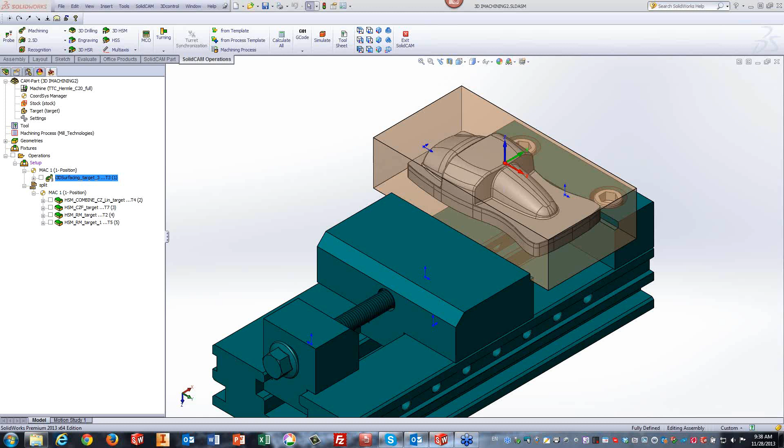Now, if we take a look at the part on the screen itself, you'll note that's a typical 3D part. You can see it being held in the vise. If I take away the vise itself and the stock, you'll see this is the actual part. This is a part most of you have already seen in 3D iMachining demonstrations, but I decided to go into it anyway to show some different options that we have today in iMachining 3D.

Now, if I were to open up just the operation for a moment, we'll take a quick look. Of course we have our target, and I just want to mention again the working area. If I go into define, you'll note I didn't choose any working area, but the only thing we have here at this moment is that it's automatically set to cut only the rest material.

In this particular case, I'll be using a 12 millimeter end mill with a 0.6 millimeter radius on the tip. And if we go into our technology wizard, you'll note that we'll be going down two steps on the part. It's broken up into two separate steps.

Also note, however, that if I were to do this in two separate steps, you would have all the material left over in the middle that still has to be roughed out. And of course, in our technology area, that's where we have the area for the rest rough, whereas the rest rough will automatically step up on the part.

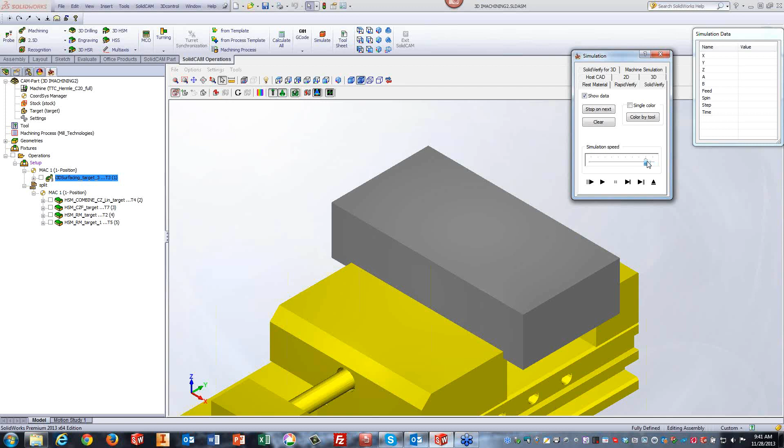Now, you'll note that it's going down its first step, and when it finishes its first step, you'll note that it's cleaning up as it's going up on the part itself. Notice it didn't go down to its next step. It went down its first step only, and then it went up to its next step. Now, let me show you exactly why.

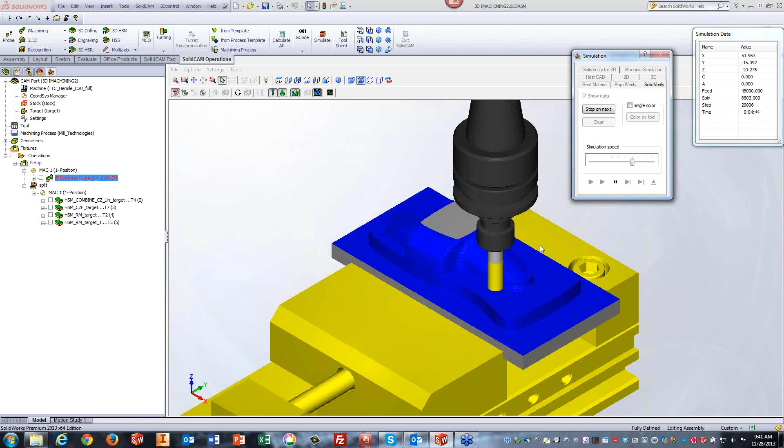If I go into the operation itself, you'll note again, if I go into technology, that we have the option over here of each down step, then rest rough. So it first does the down step, then rest rough up to the very top. Then when it finishes that, it goes down to the next down step, and then again roughs up until where this one left off.

Now, you'll notice also in my screen right now, this is grayed out. In other words, you only have the option of the very first one. The reason why it's grayed out is if I go back into tool, we have another option over here which I've used called holder collision.

When I use holder collision, it automatically closes that area over there and uses the step down first, then rest rough, and then another step down, and then rest rough again.

If I were to uncheck holder collision and then go into my technology, you'll note that both fields are now open. This, by the way, is very important to make sure that when you're using your tool with the holder, you can get as close as possible as you want without fear that the holder will hit the stock material.

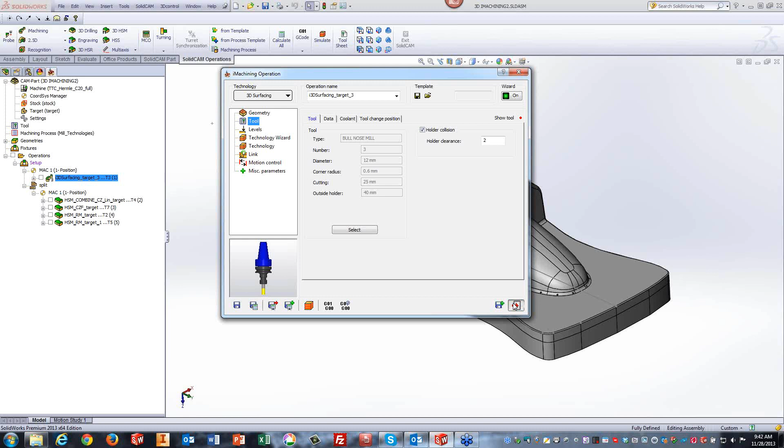Now that we've cleared the material using the iMachining 3D, I decided to continue on with the part using HSM to finish off the part itself. I've used several different types of strategies to do this. My first strategy was as follows.

I want to first work on this area over here. Note we have a flat area over here on these two sides, and the rest, as you can see, is working. We have areas that are relatively steep, and areas that are relatively shallow. This area over here is not a flat surface, it's actually an angled surface with a little bit of radius, so it's also relatively shallow.

Now, we know in the past that constant Z works very well on steep areas, whereas linear works much better on shallow areas. We have the operation of constant Z and linear, but we also have, if I open up the operation, an option of combining constant Z together with linear, which is exactly what I did in this case. Let's first take a look at the simulation.

I'll use the wireframe for this simulation. Run my simulation, I'll slow it down a bit, and note it first does the constant Z, and when it finishes the constant Z, you notice it's working on these walls over here. This area did not touch yet.

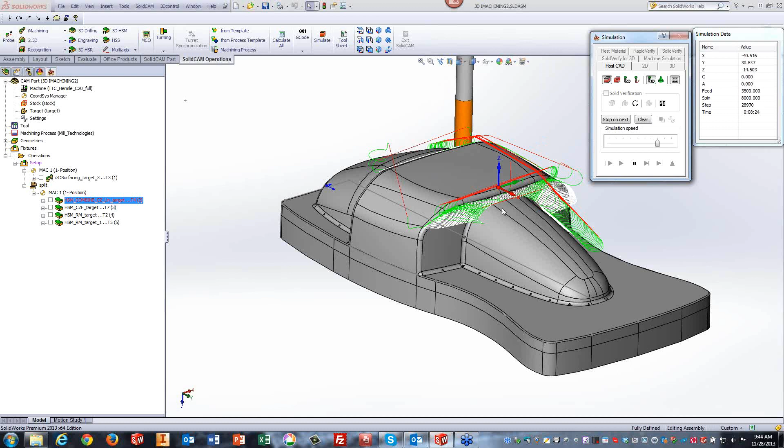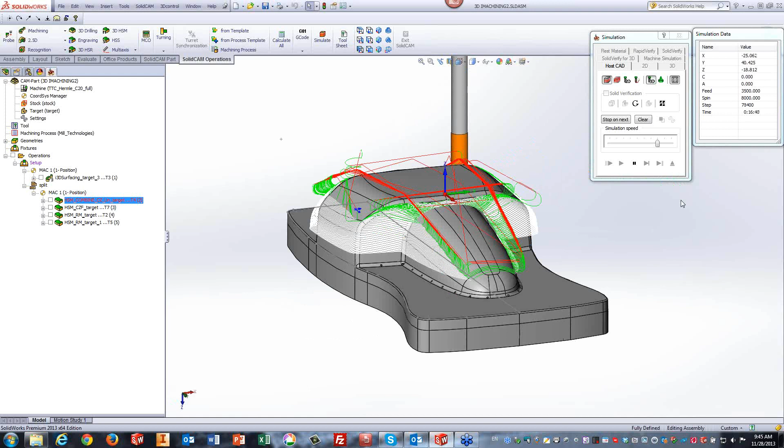This area over here wasn't touched either. Now this area is steeper, it's starting to work on this area as well. Same thing over here, this area is steep, it's working on these areas here too. Go around the part, it's being done on the entire part. When it finishes those areas, it'll start doing the linear cuts as shown over here.

We're about to start it. Let me just finish off over here. Now you can see these areas were done with linear cuts across the part, which are shallower areas. Now you'll note that when I did the linear cuts, it did not touch this area.

Now the reason why I did not touch this area is not because of my boundary. The boundary that I gave for the part itself, if I were to actually go back into the operation, the actual constraint boundaries, is the entire part. But what I did was as follows.

First of all, let's go into my constant Z passes. You'll note that to keep it on the steep areas, I limited the angles of engagement between 40 and 90 degrees on the part. If there's anything less than 40 degrees, it won't machine over there, which is obviously these areas over here, as well as the floors, because it's less than 40 degrees.

Now, if I go into my linear passes, we have it up until 43 degrees, but I also limited the minimum angle to 0.1. Since this is a flat floor, if I just give it a touch of an angle over here, it won't machine this area at all. So instead of making a boundary around that area, I just simply changed the angle to 0.1. Made it a lot easier that way, and this way it did not work on the floor at all.

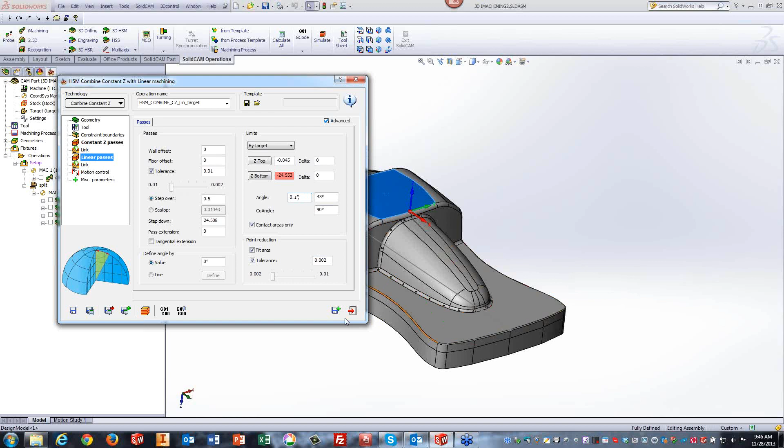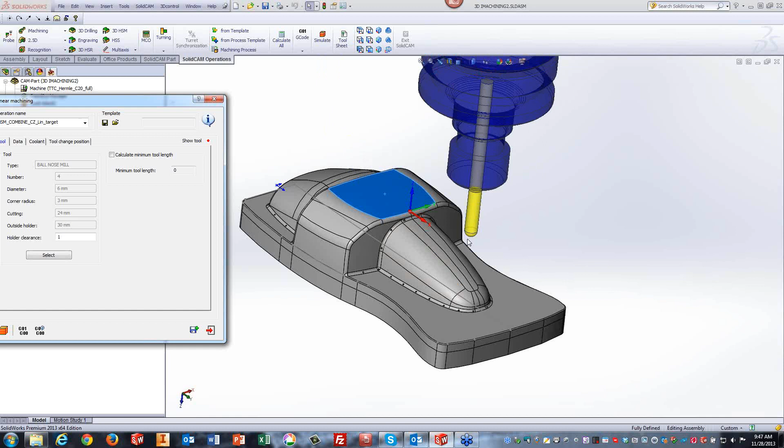Now, what I did in my next operation, oh, one more thing I forgot to mention, in my geometry page, since I'm using a 6 millimeter ball end mill, the radius of that tool is larger than the radius that we have over here in these corners. So to prevent having a sharp turn or sharp corners in the toolpath, in the geometry area, I've added the option of apply fillet. By adding the apply fillet, what that actually does is very simple.

It adds a virtual fillet to those corners according to the value that I put in here, and that value is larger than the value of the tool. This way I guarantee myself a radius toolpath in that corner.

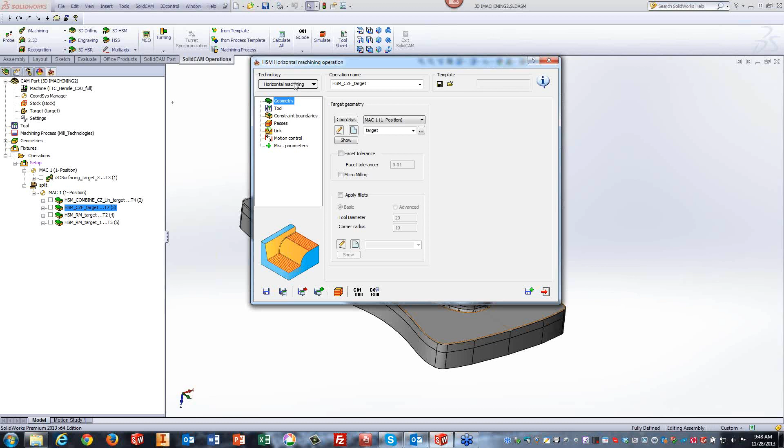Let's go into our next operation, where I dealt with my flat floors by using horizontal machining. This is specifically made to recognize all the flat floors, meaning they're exactly 0 degrees. I've used a tool with a flat bottom, actually a bullnose tool, not a ball end mill, because on flat areas like this I can work with a flat bottom tool to cover more surface for fewer toolpaths.

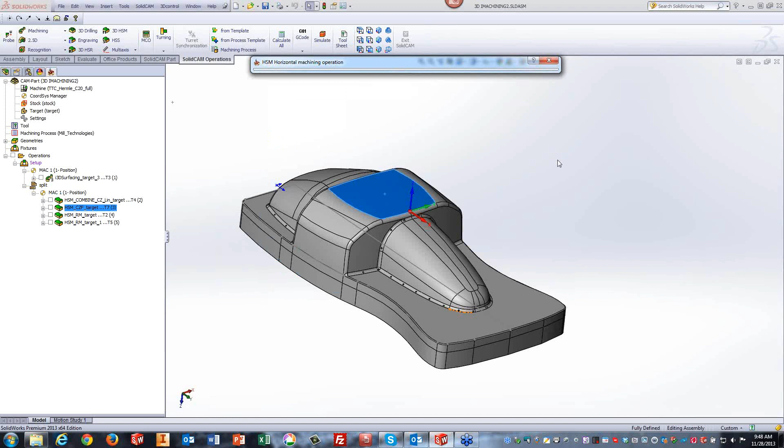In our passes area, I've checked the box called Detect Core Areas. The reason is that these floors can actually be approached from the outside, rather than having the tool come down on top and work its way out. This is now an option in horizontal machining under passes, called Detect Core Areas.

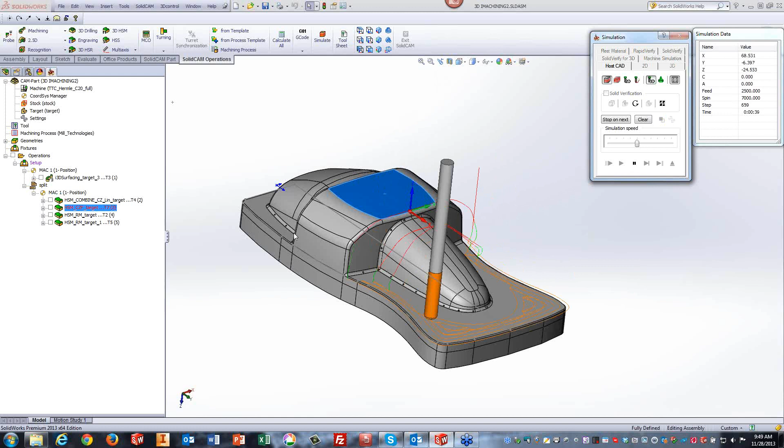Let's take a quick look at the simulation. I'll run it and slow it down to show the tool. You'll see the tool comes from the outside, working its way in, and the same thing happens on the other side. It works from the outside, not coming in from the top.

Let me change the color of my toolpath to make it easier to see. I'll run the toolpath again, and you can see it working from the outside going in, same thing on this side as well. Now, of course, we have to deal with the corners.

The corner is actually pretty small, and if I were to go into these corners with a very small tool, say a 2mm radius at the bottom, in other words a 4mm ball end mill, I'll still have a lot of material left over. I'm asking that small tool to take off a lot of material, and this can sometimes be difficult for that type of tool.

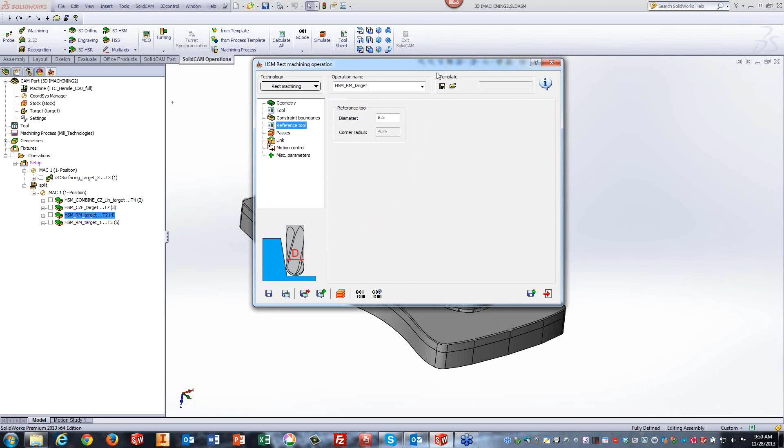So I've broken it down into 2 steps. In my first operation of rest machining, made specifically for removing excess material on those corners, I used a ball nose mill of 6mm, so a 3mm radius on the corner. In my reference tool, since the fillet I created was 4mm, as if it was an 8mm tool, I gave it a reference tool of 8.5 to give it a little overlap.

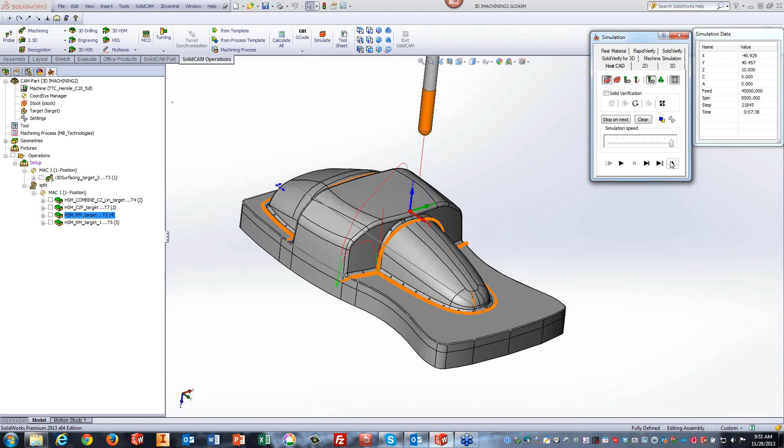This works exactly as I wanted across the part. Since I'm working with a 6mm ball end mill, I'm leaving a radius of 3mm now. I still have to take this down, but since it's a larger tool, it worked a lot easier on that excess material. Let's go into my next operation.

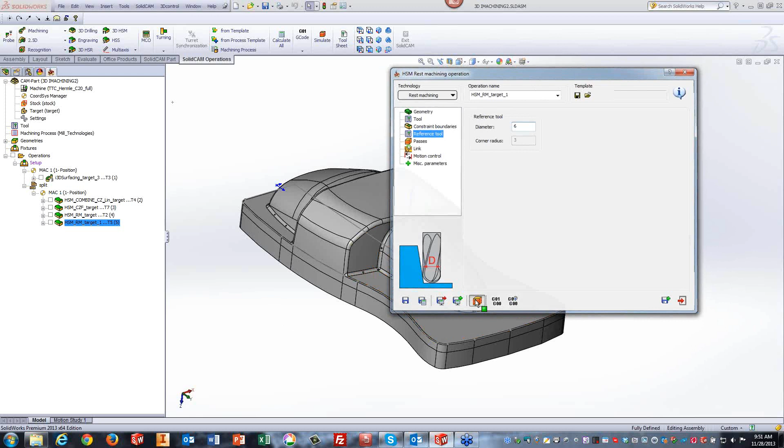In this operation, again rest machining, I used a smaller end mill, taking it down a step. In my reference tool, I used the actual reference tool from my previous operation, the 6mm ball end mill, so it just continues from that point. Looking at the simulation, you'll see it works exactly in those areas as well.

Okay, let me start now my next part. Actually, let me first close this - I like closing the part first and then opening it, although I can do it the other way too.

We'll open my next part. The next part that you're about to see is actually a sort of a mold.

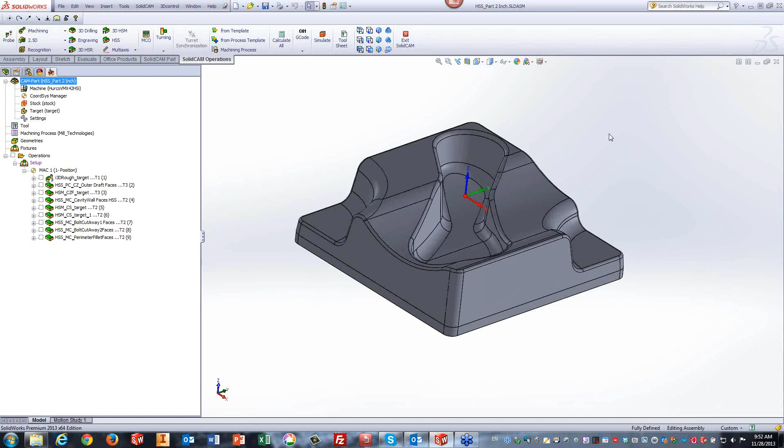First of all, these floors over here are flat as well. There's a little bit of a flat area on top, and I believe this area is also a flat surface. Now, we have a nice area that's also kind of shaped, relatively shallow.

This area inside is also a shallow area. You'll note these walls on the side are actually tapered walls, and we have a nice radius, a nice fillet going around the entire outside of this part.

Now, the roughing that I've done on this part, I used 3D iMachining 3D. Going into the part itself, you'll note we have our geometry. I did not create any kind of a working area, we just have the cut-only rest material.

In this particular case, this part was done 1 inch, so we have a 3/8 of an inch, which is approximately 9.5 millimeter end mill on the part itself. It has a little bit of a radius on it as well on the corner, as shown over here we have a little bit of a corner radius.

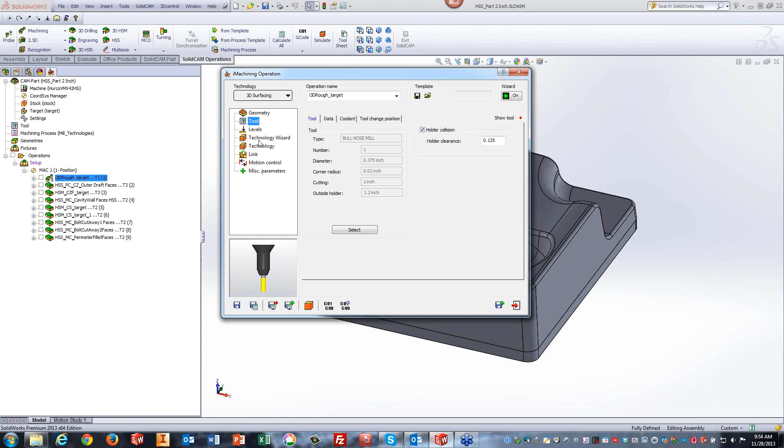Also note, I'm using the holder collision. If I go into my technology wizard, we have going down 2 steps onto the part, and of course we have the rest rough working here as well to take off the material as it's going up. Take a quick look at the simulation.

I'll use the Solid Verify to simulate the part. You'll see that the tool, I'll slow this down, first does its cut over there, going into that pocketed area, machining it out nicely, as well as this area working its way in.

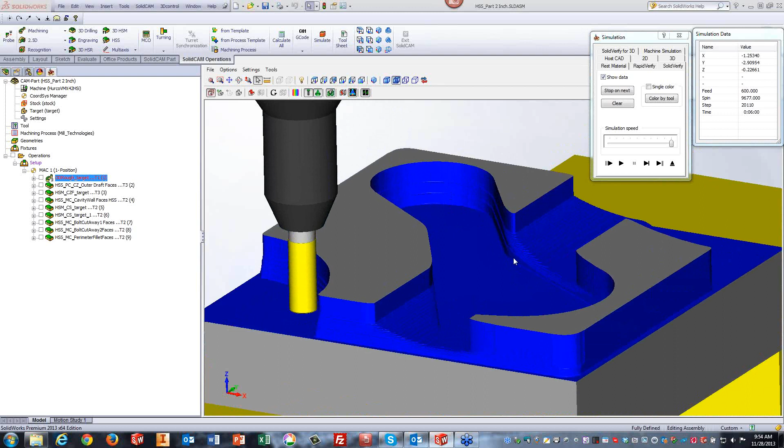Let me stop here for a moment. You'll note that it's starting to go up on the part itself. You'll also note that this area has less steps than this area. This is what the scallop control actually does. Since it's a scallop control, this is a shallower area than this one. This is a very steep area, so it doesn't need all these small steps on the surface. It's enough these large steps over here to get the exact results that I need.

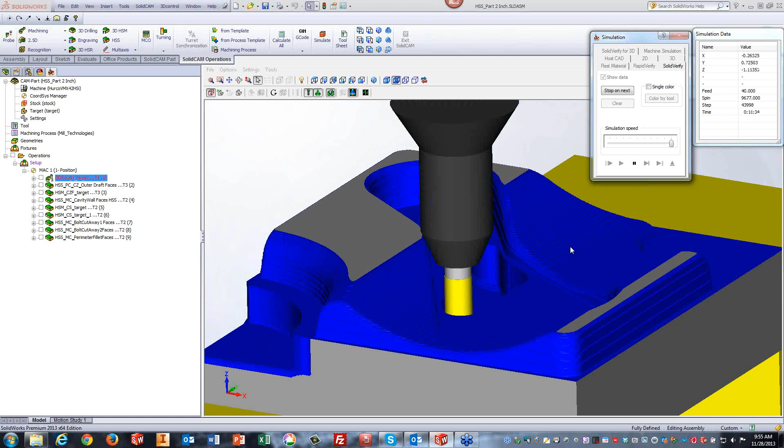Continuing on with the simulation, you can see that as well over here, the differences in the steps as it starts going up. And we have it going down on the entire part. Again, it went down now to its next step, and then it starts working up on its next step all the way up to the top as well.

Now we actually started with the machining on the part. Actually on this part, not only did I use HSM in certain areas, I even used HSS as well. Even though the webinar is not on HSS, I'm just going to show you some of the steps that I did in HSS, because I think it's really very nice the way it's done in HSS in this particular case.

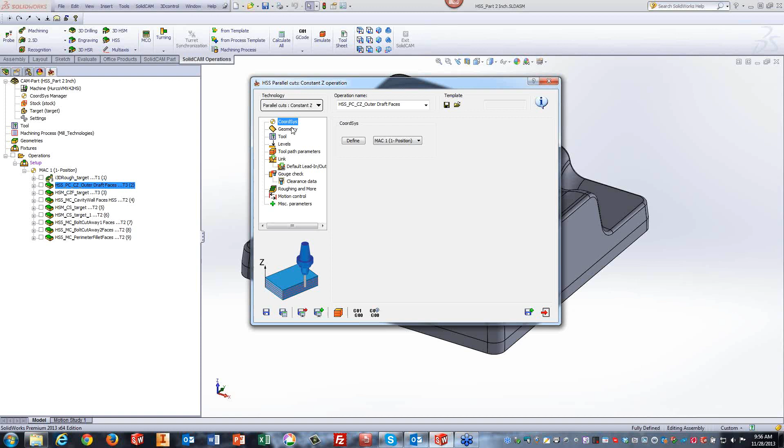What I did in my first case was I dealt with the walls around the part, and I actually used the constant Z option in parallel constant Z in HSS to work on these walls. Let me just go into the operation itself, you can see I use the parallel cuts constant Z. In my geometry, you can see that my drive surface is the surface going around the walls itself.

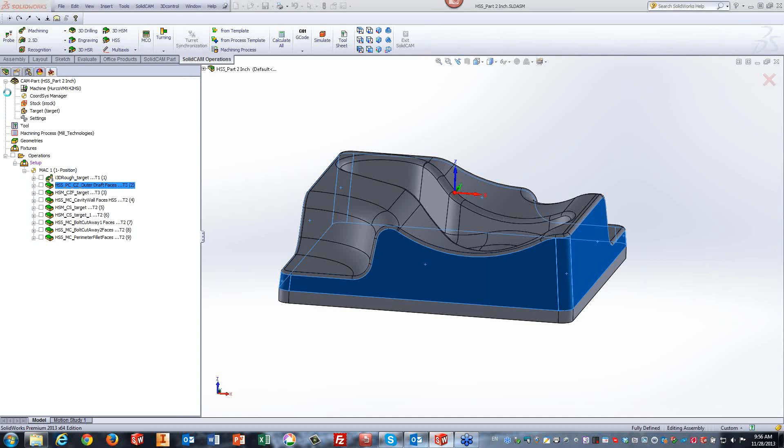Note that in these areas over here, there are actual gaps going to its next area. So the way I dealt with that, instead of going across to the next area, if I were to go into my toolpath parameters, I went into sorting, and in sorting itself I changed my machine by to be regions instead of lanes, which is the default, so it actually works in different regions at a time.

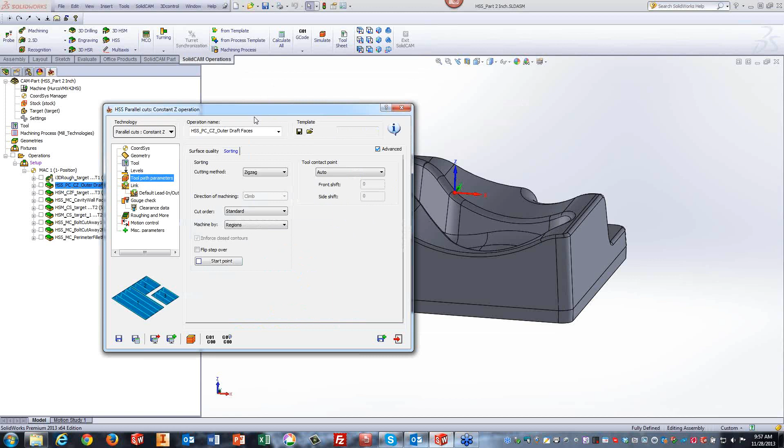So instead of continuing on to the next area when it sees an area over there as a different region, it'll work back and forth in this area, and the same thing as it goes down. So you won't have that jump as it goes to the next surface. Instead, it'll work on this surface over here. When it gets down to the very bottom, this area will continue working as one continuous surface.

Let's take a look at the simulation itself. It's a very simple but clean toolpath around the part. Let's take a look, I'll make it go a little quicker. You can see that in these areas there are very little jumps going around on the part itself.

When it went to this area over here, it didn't go across to this area, but instead it actually continued working. And on the bottom over here, this area itself just continued working around on the bottom. This was done simply with HSS. I thought it was actually a very nice toolpath, so I threw that in here as well.

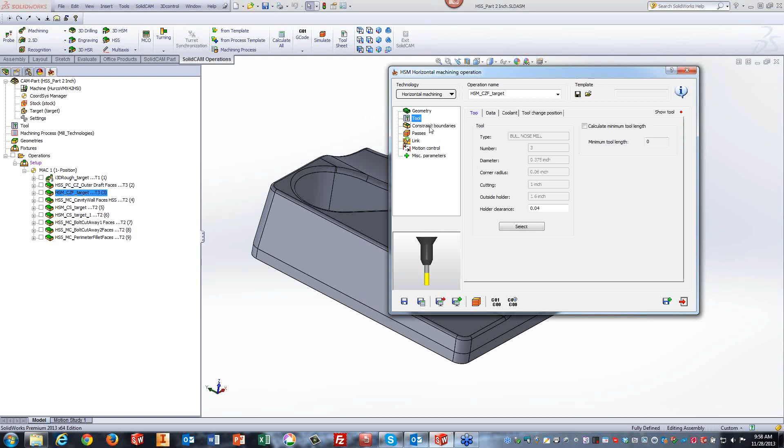Now let's continue, however, with the HSM. In the HSM, first I dealt with the flat floors in this particular case, and if I take a look at the operation itself, we have horizontal machining. We have a tool that has a flat bottom to it with a little bit of a radius.

In our constraint boundaries, I decided to give it a boundary, even though I didn't really have to, of working between the outside. Take a look at the bottom over here at the top view. We have between the outside and this area. The reason why is because this area over here is also flat, but I did not want it to work in that area itself.

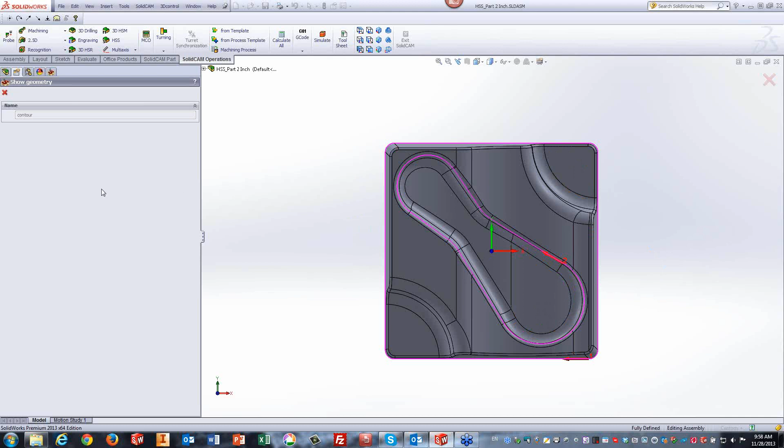So I just limited it to those areas over there by doing a simple boundary name. Note again my passes - I have detect core areas so that I can go in from the outside on those areas as well.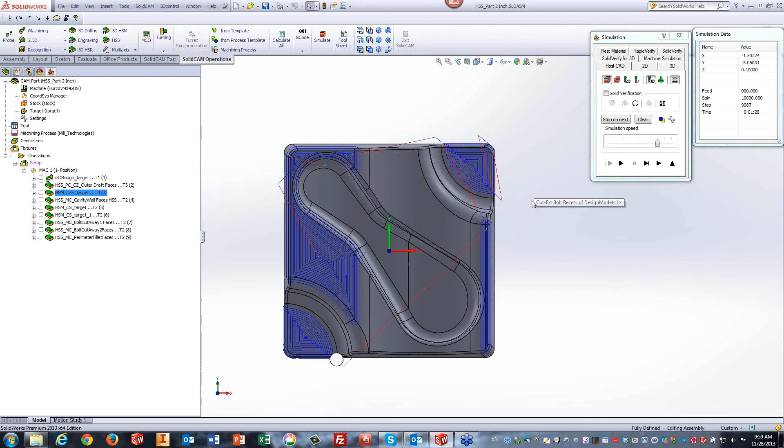Now let me start talking about our next operation that I want to show you in HSM. The next operation in HSM that I'd like to show you is actually something called 3D constant step over. If I were to open up the operation itself...

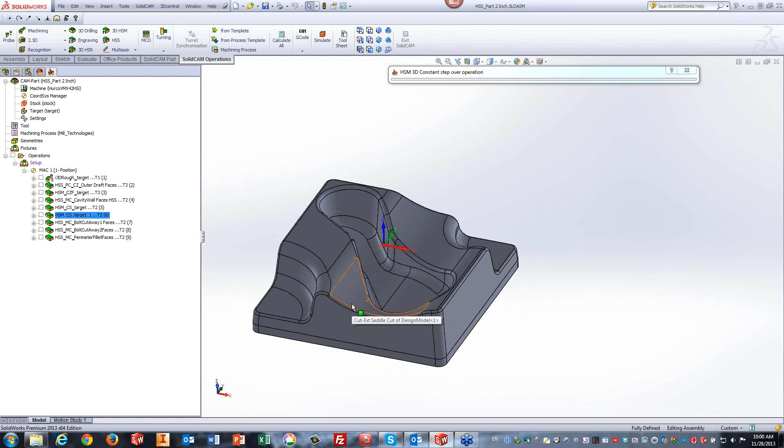First, before I actually talk about the operation, I want to look at these surfaces over here. Note these surfaces, as well as the area inside over there - these can be done very nicely in linear. However, what I've decided over here is, I'd like to actually have the tool, instead of going linear back and forth on the part, work according to the shape of that particular area.

Many people I know that work in molds actually like to have the shape of the toolpath itself going according to the shape of the area. So for this, I've used the option of 3D constant step over.

Now, the constant step over means as follows. It actually combines - if I go into passes, you'll note the horizontal step over and the vertical step over. What this does is combine the two to give an even step over no matter what the surface condition actually is.

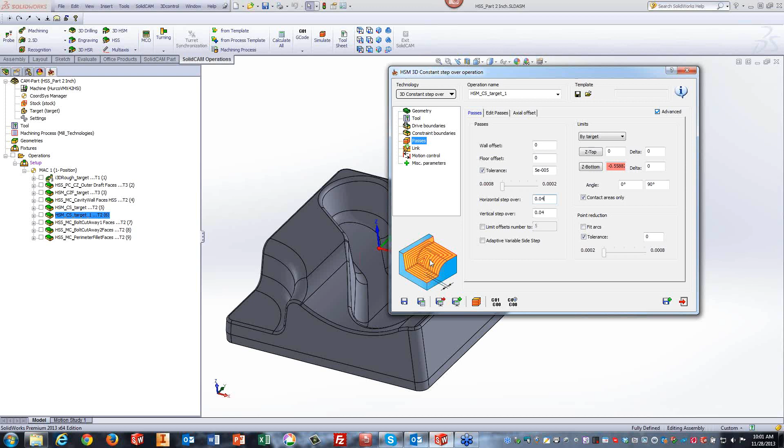So if I have them both set at the same number, even as it goes down from the top view, you'll note that the distance in these areas between step and step will be the exact same as it goes around the part itself. Let's take a quick look at the simulation.

With the toolpath, let me speed it up just a little bit. You'll actually see it's taking the shape of that particular area as shown over here, which gives us a really nice, clean toolpath on that surface.

Now, I did large step overs just so that you can actually see the toolpath itself. Obviously, when you're working on a real mold, the toolpaths and step overs will be smaller, so you can get a nice, smooth surface as well.

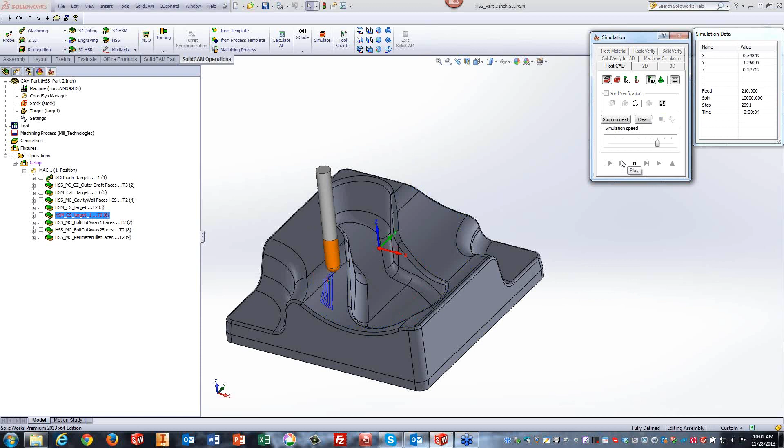Taking a look at the very top of the part from the top view, you can actually see the real toolpath that we're getting along the part itself. The same was also done in this next operation, doing this floor surface over there as well.

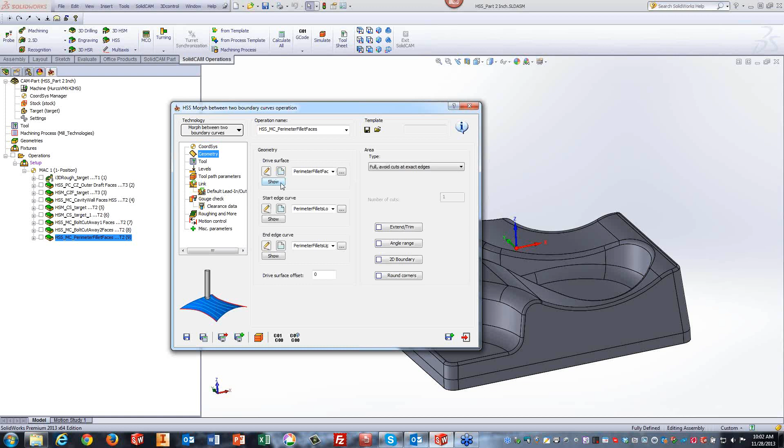We're just about finished with the part, but one thing I had to show you was how nicely the fillet was done on the part. If I go to my next operation, this was actually done using HSS. In the HSS operation, you'll note I use the option of morph between two boundary curves, whereas my first drive surface was the radius around the part itself, as shown over here.

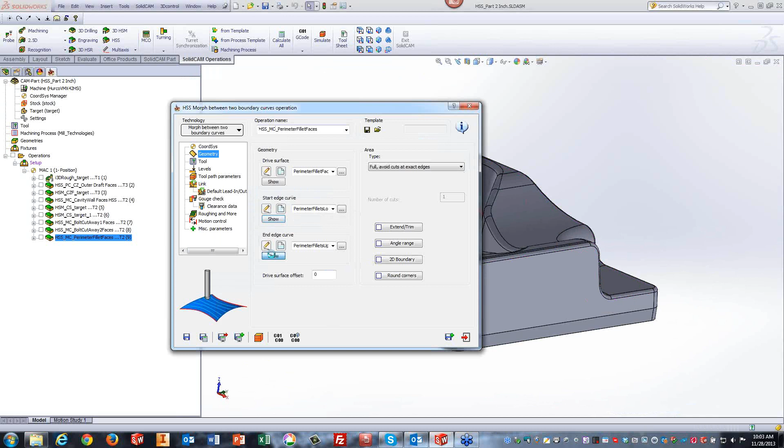The start edge was the edge at the very bottom, as shown on the part, at the very edge of the radius, and the end edge curve was the one on the top.

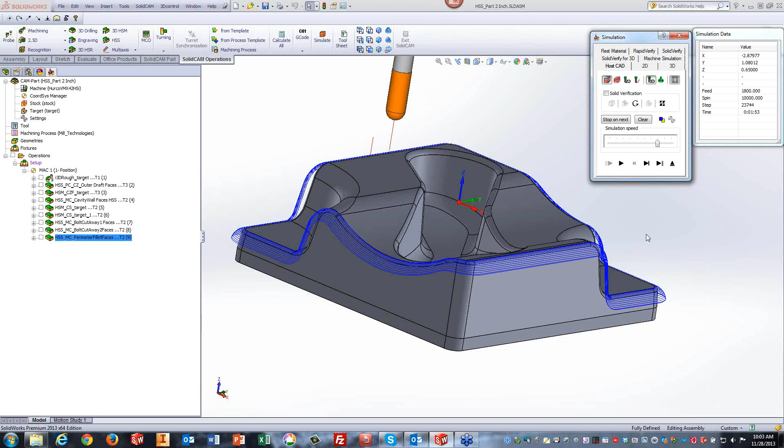Taking a look at the simulation itself, I did a pretty big step over, so it makes it a little easier to see what's going on. You'll see it's working more between the two curves, keeping a nice even step in between each area without it jumping up at any point. There are no gaps in here. It actually did a nice smooth cut around that fillet. This is probably one of the best ways I've seen that we have for machining fillets.

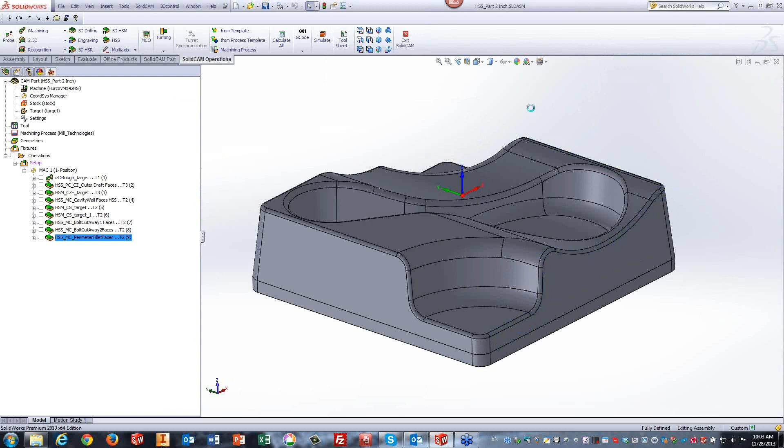Okay, now that I've finished this part, let's take a part that's a little larger. I'll close the part that we have on our screen, and we'll open up our next part.

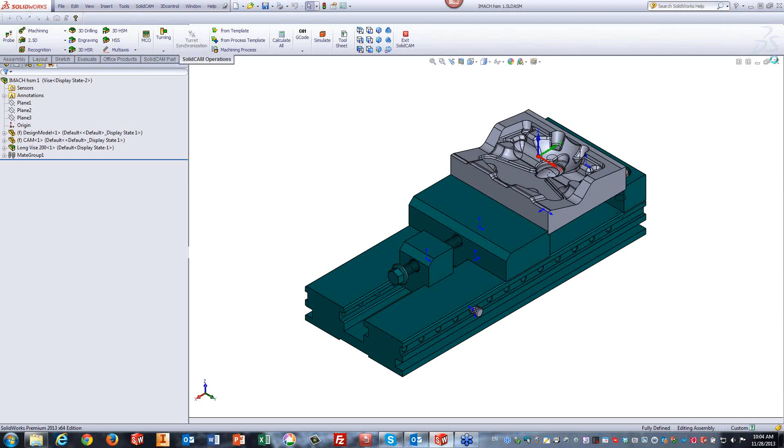No, actually, I want to do another part. This part everyone knows, but I actually want to do a part that's actually larger. My mistake for opening that one, sorry. There we go. Okay.

Taking a look at this part, you can actually see this is a nice mold. By the way, this is a part that we actually did cut - we have the part here in our office. You can see all the different shapes that we have in this part. It's actually a pretty interesting part.

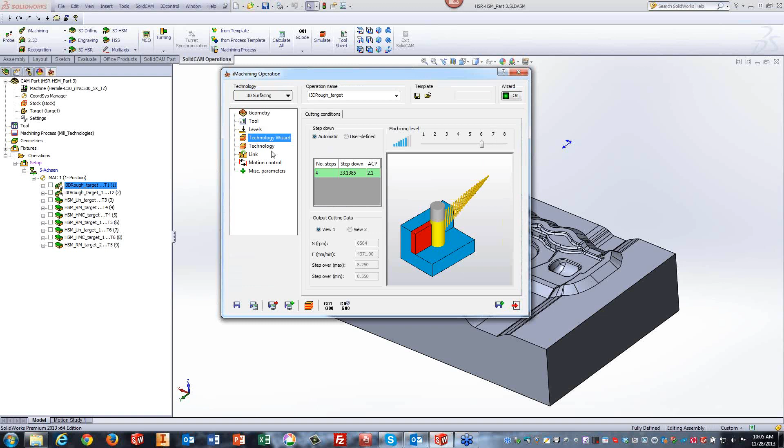What I've done here inside iMachining is I've broken it down into two different tools. If I open up the first operation, you'll see our target. My tool is a relatively large tool, a 20 millimeter end mill on the part itself, and we have our step downs as shown over here, our technology. I also have it set at each step down, then the rest rough.

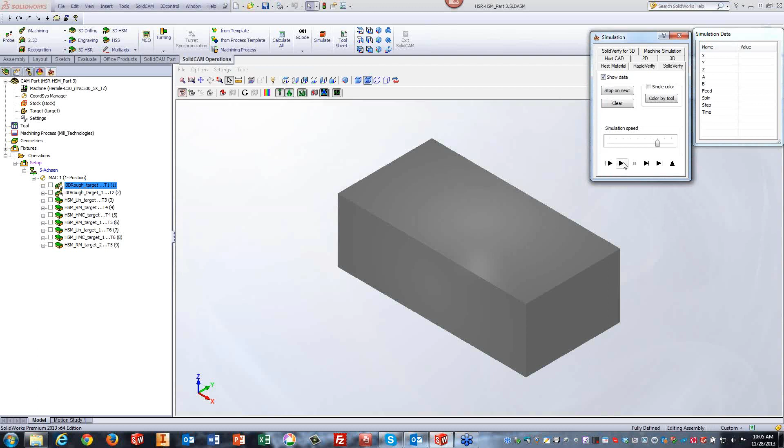Let's take a quick look at the simulation itself. I'll use SolidVerify for the simulation. Note the part actually loads very quickly, even though it's a large part. Now let's continue with the simulation - you'll note it's taking a very large cut because it can, and then stepping down.

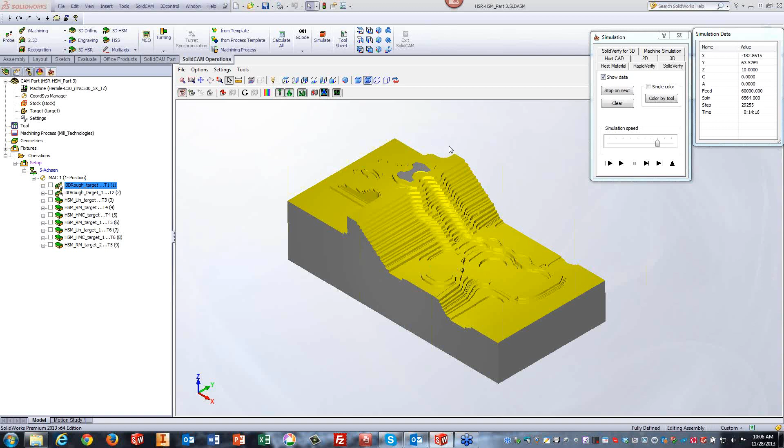In this particular case, I have a large scallop because I want to take care of most of the material that I can with this tool. I just want to get most of the material out of the way because there are areas that I need to get into with a smaller end mill for the roughing, but I've cleaned away most of the material already with this larger end mill.

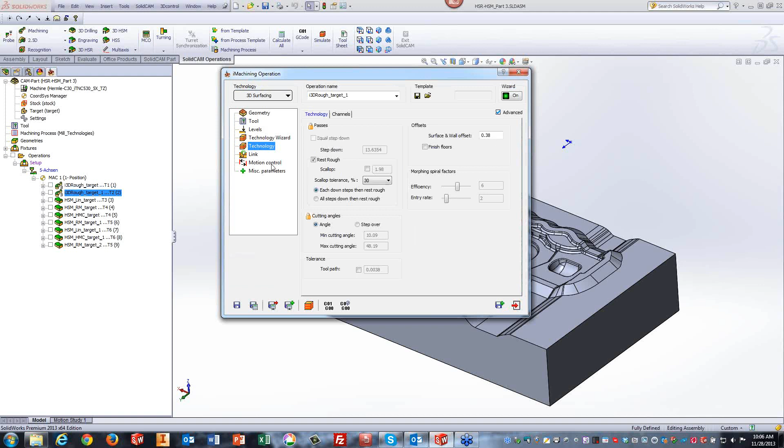In my next operation, I've saved and copied the previous operation, but all I did was go into my tool and change the end mill to a bull end mill with a 12 millimeter diameter and a nice radius on the corner, a 4 millimeter radius. Again, in our technology we have the exact same thing we had before, but this time our scallops are smaller than in the previous operation.

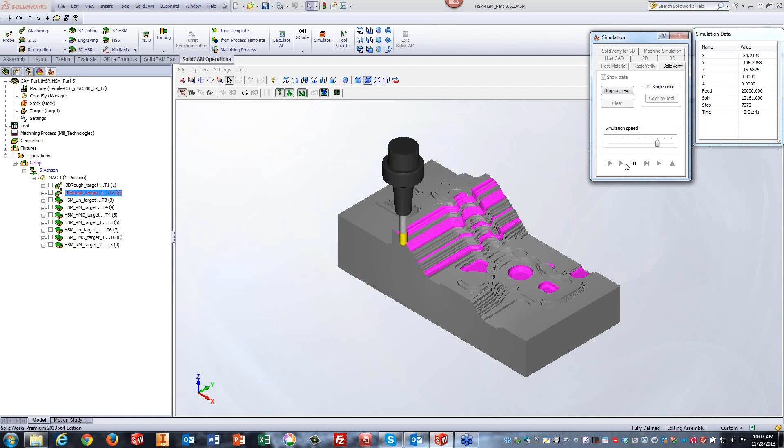Let's take a look again at the simulation of this part. Again, I'll use SolidVerify to simulate it. You'll note that the tool is only working in the areas where the previous tool did not work. It is not working anywhere on the outside, no air cuts over here. Everything is being done exactly on the part itself.

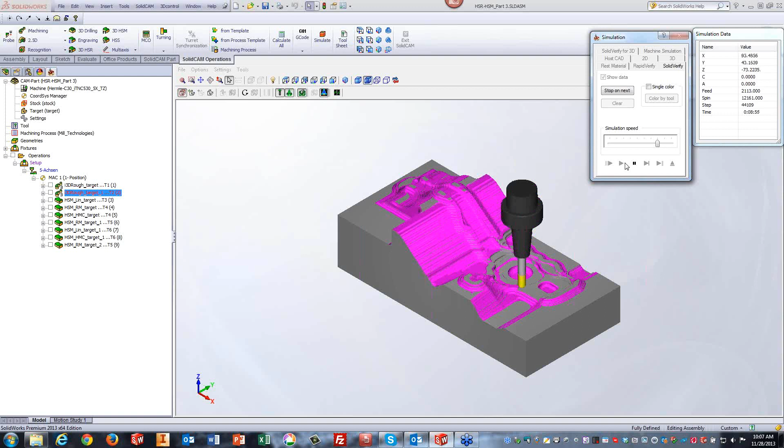Remember, in our working area of machining, it's automatically checked off that it cuts only rest material. That makes it recognize only the material left over from previous operations. If it's a complete stock, it'll work on the complete stock, but if something was machined away, as in this case, it's only machining the areas that were left over, as shown here. We'll let the simulation finish until the very end.

Speed it up just a touch, and you can see that it only worked in those areas very nicely, not touching any of these other areas at all.

Now we go into our HSM. The way many people like to work on molds, since molds need a really nice smooth surface, what they'll do many times is simply work with HSM first as a semi-finish, leaving a little bit of material left over on the part itself for a finish cut, leaving a minimal amount of material, also leaving a lot less variance in pressure on the tool, because the surface left over after the semi-finish is a lot smoother than the rough cut itself.

If I go into this operation over here, for example, you'll note that we did a simple linear machining on the entire part. If I go into my passes, you'll note that we're leaving 0.2 millimeters of material on the surface itself. If I run my simulation now, in regular Host CAD, you'll see it's going across the entire part.

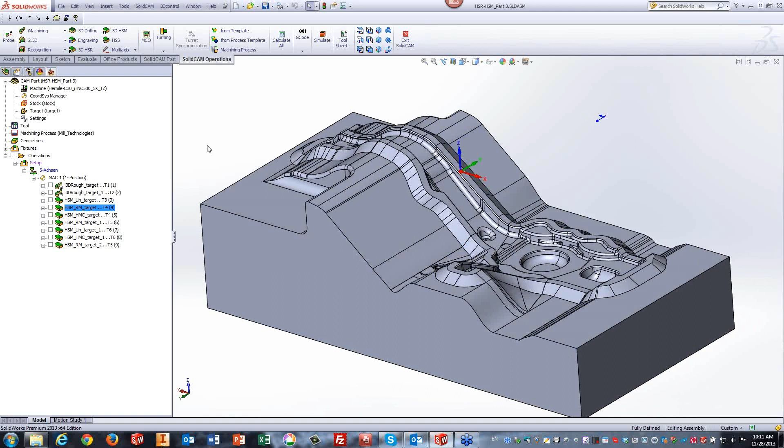In our next operation, I've used a different type of strategy. Looking at the part, I'd like to have areas which work constant Z, but the rest of the areas do something very similar to a 3D constant step over. For that, we have an operation in HSM called hybrid constant Z, where it works constant Z on the steep areas, but when it goes into areas that are angled off, it starts doing something similar to the 3D constant step over, working according to the shape of that particular area.

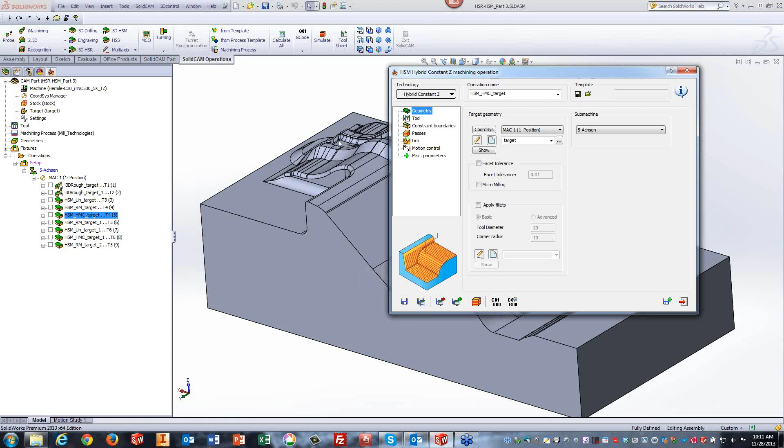Let's look at the simulation on the part. Taking a look at the top view, I'll run the simulation - let me move this over to the side. You can see the constant Z tool passes as it's going on the part. Let me speed this up a little.

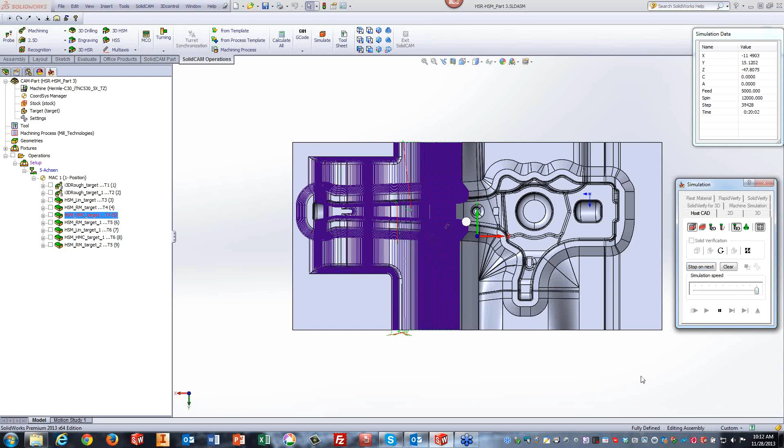You'll note that in certain areas, all of a sudden it starts working differently. Note that this area, which is flat, was not machined at the very beginning, but was machined at the very end. Even the flat areas were machined - normally constant Z does not do that. Constant Z does not work on flat areas.

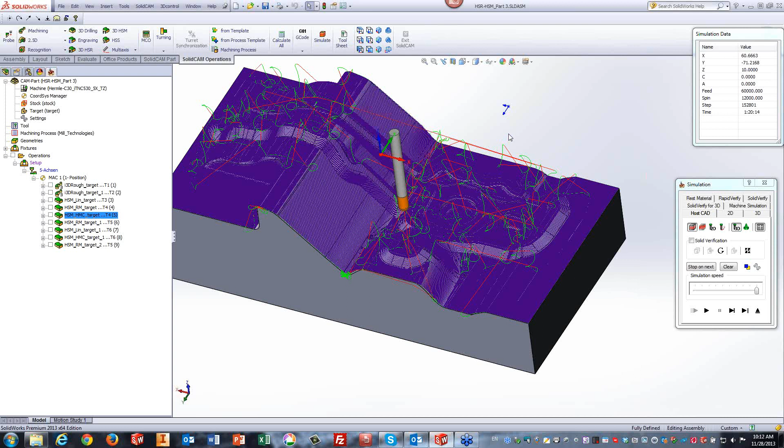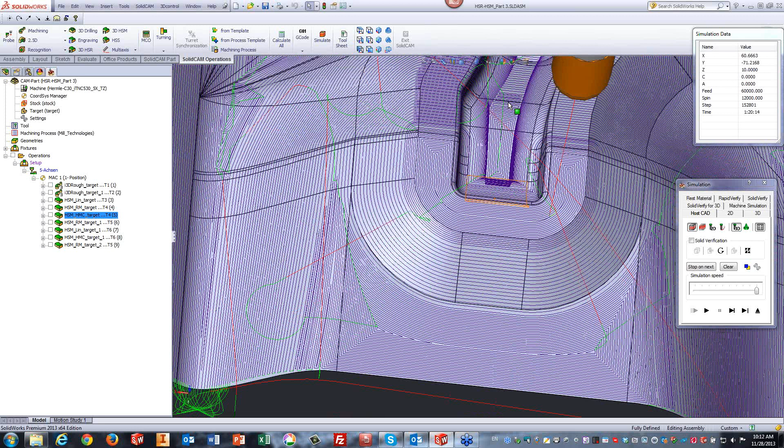However, the hybrid constant Z takes those areas and treats them like a 3D constant step over, in that area and in these areas as well. If I take a look from the top of the part, you'll note it treated that area as if it was a 3D constant step over, according to the shape of that particular surface - same thing here in the middle. This is actually a very good one-step solution for doing parts such as molds, such as we see over here.

I find it actually a pretty powerful operation, and we like working with it on these type of parts. It gives you that really nice finish at the end, exactly the way you need for each surface.

Now, I'd like to actually load one more part. The next part I'm going to load, I'm not going to go through all the operations that I did over there, and it's actually a pretty large part, but I just want to show you some of the manipulations that I've done on the part itself.

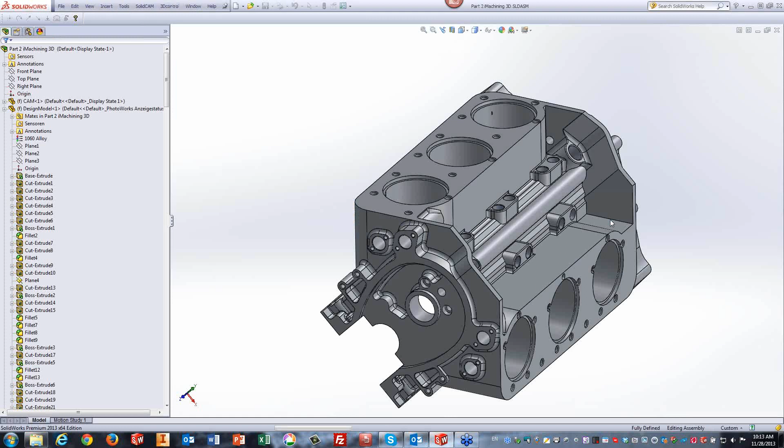Opening up the part. It's a part some of you may recognize. I think it was even used as the intro picture for this webinar, this machine, this engine block as shown here. Now, it's actually a pretty large, heavy part itself.

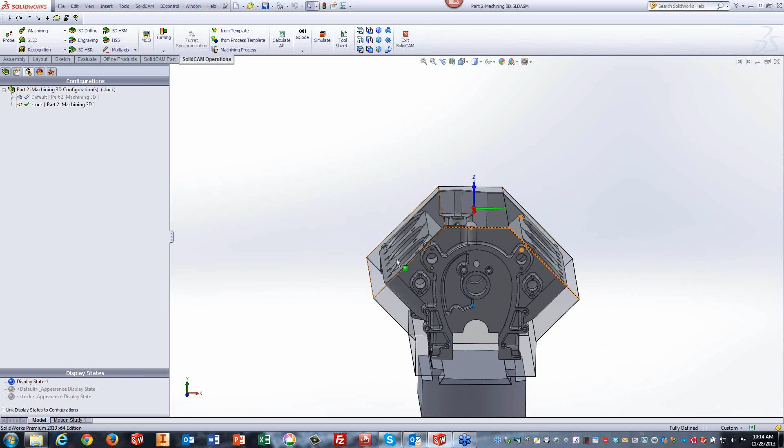If I were to show you what I've done here for stock material, we've actually had the stock material where the outside is more or less like the shape of the outside part itself, so we can have a minimal amount of material to take off as we're working on the part itself.

Now, note what I'd like to do when I start working with the iMachining, with the iMachining 3D, is to work only in this area when I'm looking from the top, and then in the holes when I'm working on the side. Let's take a look at the operations themselves.

Going into the operations, first I've done some simple face mill operations to take off material on top, on the sides, and all the sides that I can think of.

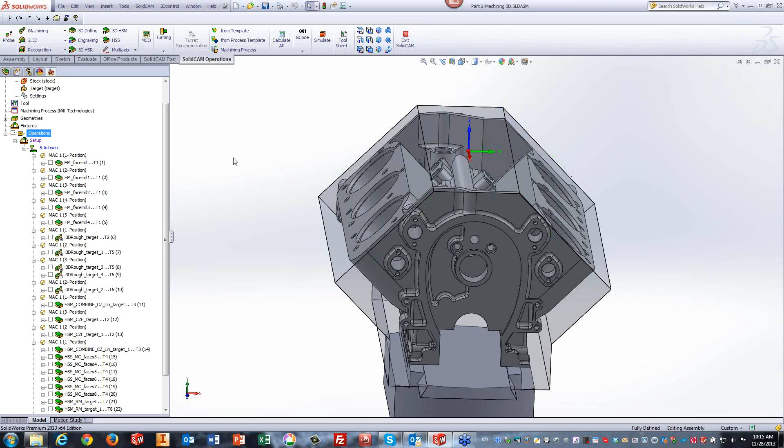Now, if I go into my iMachining, my first operation of iMachining, you'll note in my working area, this time I did give it a working area. If I were to take a top view of the part itself, you'll see that my working area is this area itself. So now, anything outside over there, it won't machine.

It'll only work within that area. But also remember that we still have the option here checked off, called cut only the rest material.

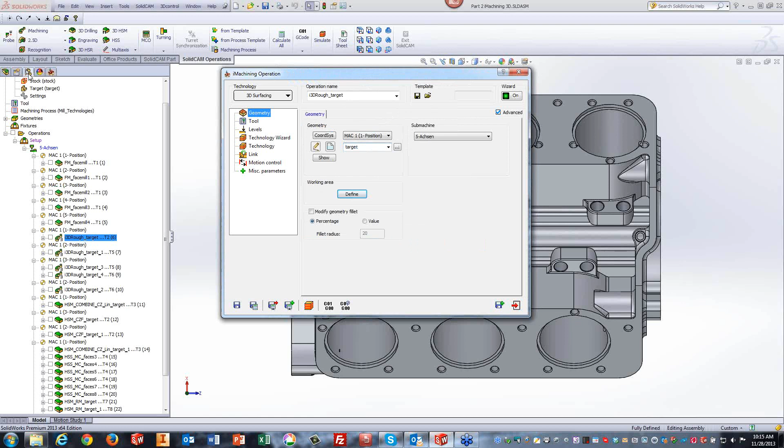Now, remember that our stock material, if we were to take again a look at the stock itself, you'll see our stock material is going off at an angle over here.

So in these areas, even though my boundary is up until this line over there, as shown, since there's no material in this area, it'll only machine from this point in. That's because it's automatically checked at the rest material only.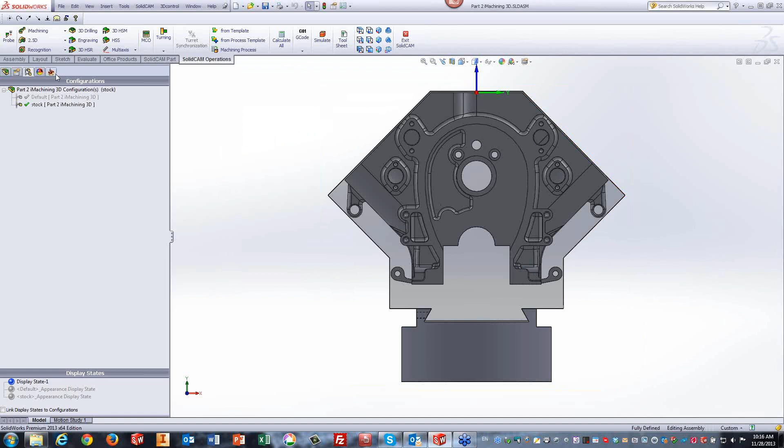Let's take a quick look at the simulation of this part. And I'll use the simulation of Solid Verify.

You'll also note that it's a large part. The Solid Verify loads actually pretty quickly on the part itself.

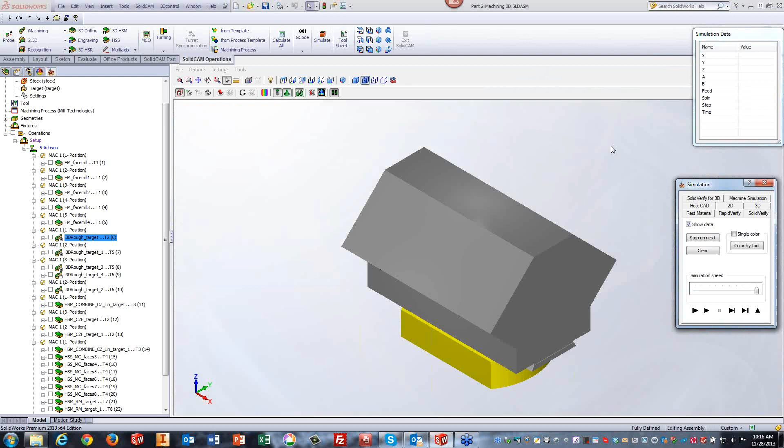There we go. Running my simulation, you'll note that it's working from the outside only in the areas where it needed to. In other words, it didn't work anywhere past the part itself, only within the areas that it really had to work. And because I gave it a working area instead of the entire part, it's only working inside that area itself.

Okay, let's run it to the very end until it finishes the simulation. And you can see it worked exactly the way I wanted it to work.

Now, my next iMachining operation in this particular case was working, and let's actually get rid of the stock here so we can see the part a little better.

My next operation here was working in these holes, as well as another operation working in these areas, again using iMachining. Now, in this particular case, I used two different operations for iMachining.

My first one was using a tool. Let's take a quick look at the tool itself. We were sticking out of the holder by 100 millimeters, a 25 millimeter end mill, sticking out 100 millimeters from the end mill itself. But I actually have to go much deeper with the part itself, into the part itself.

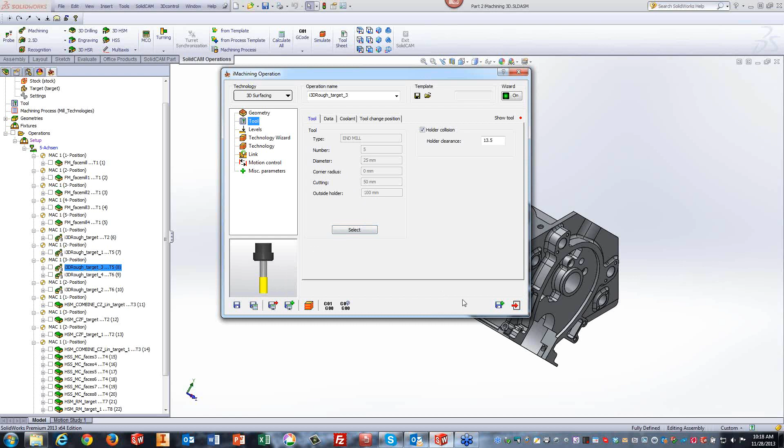Taking a look at the simulation, and again, I'll use the option of Solid Verify to simulate the part.

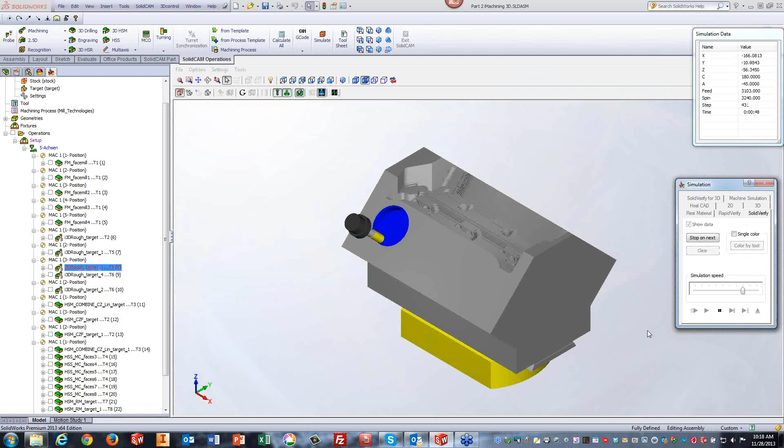You'll note that the tool is going down only to a specific depth, because I limited it to work only there.

In my next operation, I'll show you the simulation — we have a much longer tool. The next operation will only work from that area down. So I broke this up into two different operations, this way I don't need one large tool. I can use a shorter tool in the very beginning, and then the longer tool at the very end.

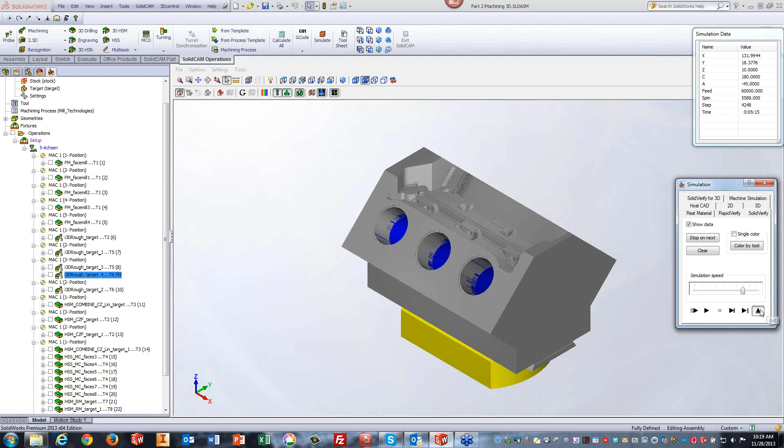I did the same thing for both sides. Now let's go into my HSM operations. If I go into the operations I did in HSM, there are two possible ways I can do it. The first way, from the top view, was just doing a combined constant Z with linear inside this area itself.

If I run the simulation on the part, using linear this time, you'll see it's working on the entire part, on all the lines over there as well. But taking a closer look at the part, what we'll see is very simple. Let me get rid of the simulation itself.

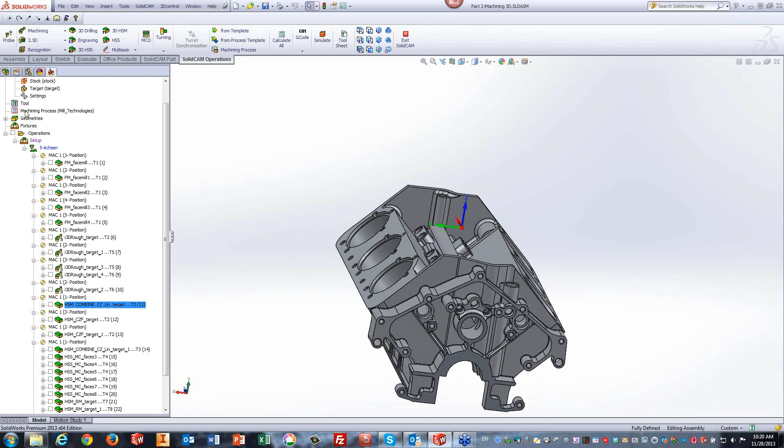Since I'm holding it on a five axis machine, I can tilt it this way, just like it did in the holes, and these areas over here are actually flat, as well as these areas over here, and the same thing will happen when I turn it this way.

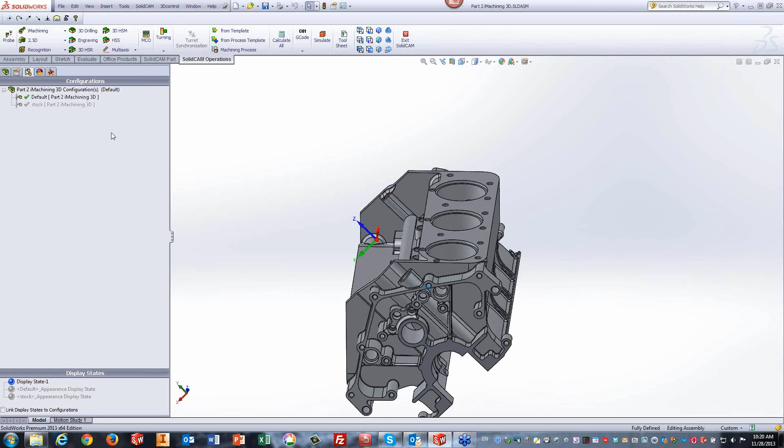So what I did was simple: instead of doing a constant Z on these walls, which requires many passes, I used the option of horizontal on these floors, as shown over here.

Running the simulation, you'll see that the tool is only working on the flat areas, and the distance between each step is much wider because it can do it with larger step overs. So we have fewer passes on the part, also working quicker because of that.

The same thing was done for my next operation, working on the other side, on the flip side over here, again using the option of horizontal.

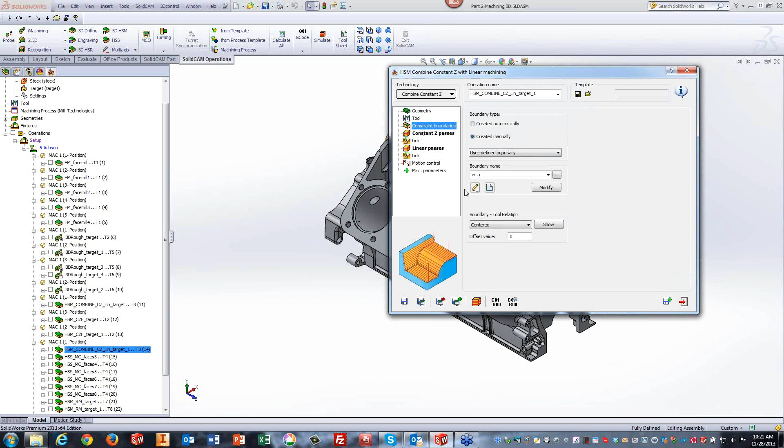Now, to work in this area, I used the exact same operation I did over here, but if I go into my constraint boundaries, you'll note that in this case I still have the entire part outside, including the walls. But I made sure it didn't work on the walls itself.

I didn't want to start messing around with the parts, finding each area over there. I just used the exact same working area as before. But in my constant Z passes, I activated my edit passes, where I have it set to auto update stock, so it automatically works only on areas where there's stock to be worked on. Where there's no stock left over, it won't work there at all.

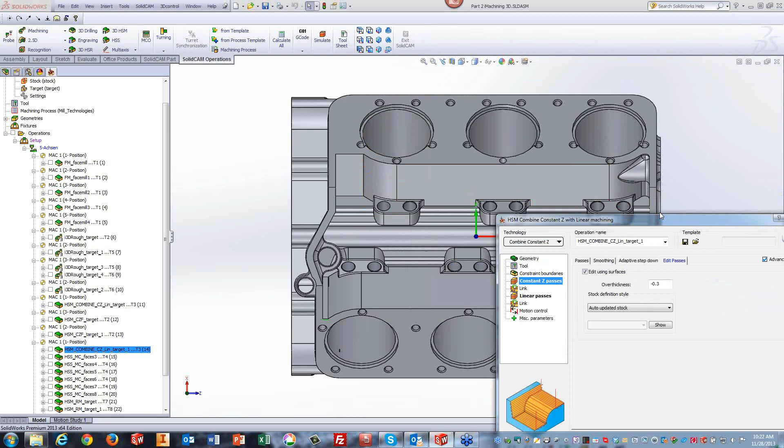So these areas, since they were already machined, won't be worked on by using this option. I even gave a little bit of a negative over thickness just to make sure, in case the part was scalloped a little, where sometimes you have a small tolerance right at that zero area.

Sometimes we'll actually do passes on it, so in the edit passes, I just gave a little bit of over thickness, this way it definitely won't work in those areas.

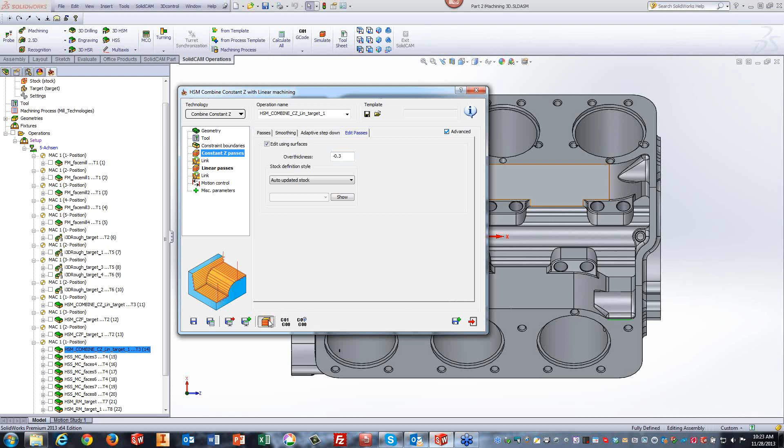Let's take a look at the simulation. You'll see that it's only working on this area over here, on the areas where it needs to work.

Let's let it run until the very end. You'll see that the tool path is only on these areas itself. Note that these walls over here will not be machined.

Let's just run it until the end, and you can see it skipping these areas altogether, not working there at all, just in the middle of the part.

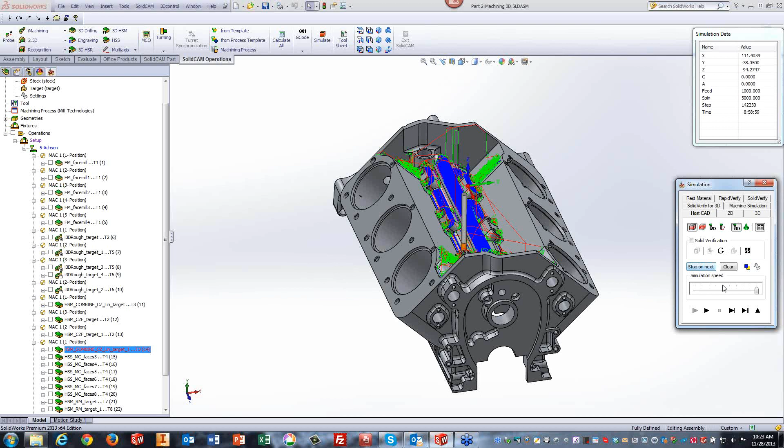So what we basically saw is different ways to manipulate and use HSM, besides iMachining 3D, which is the best way to take off the excess rough material that needs to be removed. With HSM, we used different types of strategies to work on different types of surfaces, and showed different ways we can use HSM to do that as well.